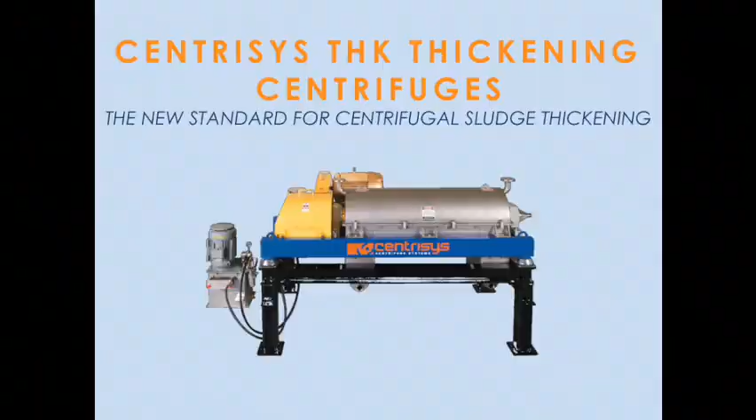We're going to give you a quick rundown and a more in-depth look to expand upon what Michael was saying with our THK division. We have a lot of new stuff coming up, and we'd like to share that with you. This is a presentation we recently gave in New York.

It's a little bit on the salesy side, but that's kind of what we do. We sell Centrifuge, we don't sell technology. Well, we sell a lifestyle too. And coats. So, yeah, if anything seems a little goofy, it's just the way we put it together for New York.

Look at that. All right. So this is Andre and me. We're from two ends of the spectrum when it comes to Centrisys. He's in the office in B2, I'm on the second floor in B1.

Michael told me I wasn't allowed to give this presentation unless I was wearing some Centrisys swag, a polo or whatever. This is my swag. I'm upstairs in the lab, running around with 5-gallon buckets playing with polymer.

On my end of things, I'm in the process department. I work with the process of where we fit into wastewater treatment. We sell a machine that goes to a plant and produces cake. It dewaters, and from there a lot of things happen, and we can do a lot of analysis on what we do and how we do it.

Wastewater treatment plants are okay—historically that's been our bread and butter. They're regulated by the EPA, which is why the EPA is awesome. Every time they increase regulations, wastewater treatment plants have more incentive to buy our equipment because they have to dewater and they can't keep getting away with the tricks they've been pulling in the past.

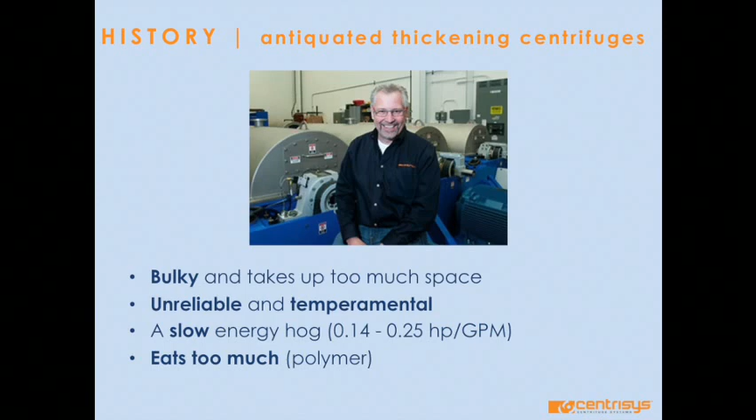They're slow. They have a slow capacity and they're a slow energy hog, and that's something George kind of talked about earlier. We're increasing the capacity and the performance of our machines with new energy and new technologies, and they eat too much—Michael glossed over polymer, but that's why I'm upstairs in the lab running around with it. Polymer is very, very expensive to plants. They get mad at me when I say we have a relationship with a company called Ashland.

We get it pretty much for free from them. That's because I'm upstairs in the lab trying to figure out which Ashland product to test for a plant and which polymer makes our product work best. Because at this point in the industry, with dewatering, you have to use polymer. But with thickening, we're getting away from that, and we are in a market and at a position where we can save plants a lot of money.

And that's why Michael's very excited and grinning creepily. No pun intended with this slide, by the way. Yeah. Nothing was intended there. Andre? All right.

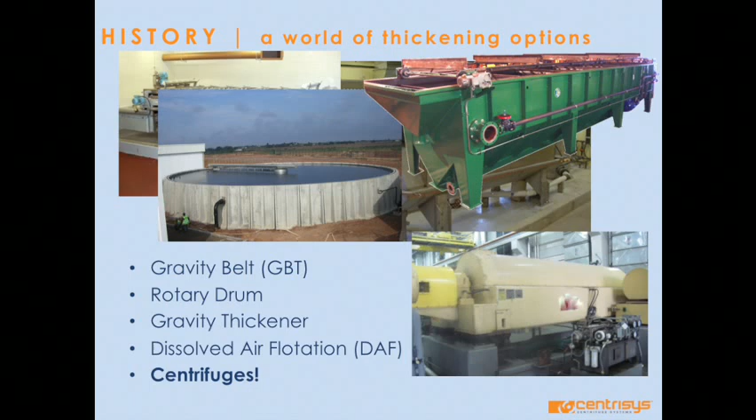Let's take a brief look at some of the current and historical alternative thickening technologies. We won't spend too much time on them, but to give you a brief run through, we're talking about gravity belt thickeners, gravity concentrators and thickeners, rotary drums, the DAFT as seen at Kenosha, and so on. And of course, there's always the good old centrifugal thickening. That's pretty much where we come in, and we've had the distinct advantage of looking at all these former technologies, looking at their pros and cons, and taking some of their weaknesses and making them our strengths. So with that said, Mike can tell you a little bit more about the Centrisys twist on our THK division.

It's just that, it's a twist. We came up with a proprietary air delivery system. We couldn't really share much with New York because it's proprietary. It stays within this room, folks. It's our thing. Except for the video.

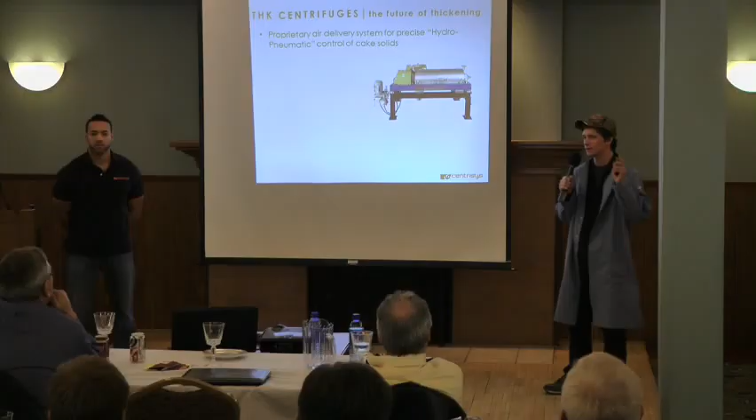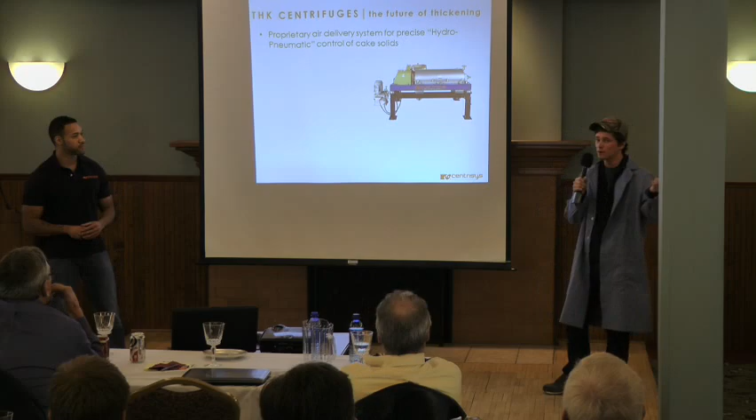We got really good control of cake solids, and what that means is we're able to maintain the performance and the output of the machine, and if something happens, all you've got to do is push a button and you'll see a response right away. With other old centrifuges, you had to shut down, open it up, make a change, maybe change the polymer dose, turn it back up, get it back going. Maybe it was going to work, maybe it wasn't. You didn't know, so you're kind of guessing. It's a guessing game, but with us, we took that out.

We also came up with a plow design for solids discharge, which was more of a mechanical thing. Andre can touch on that. Absolutely. As Mike said, anyone that's been in the field can tell you that when you're doing a demonstration or optimizing a machine, shutting down to make a mechanical adjustment is something you don't want unless you have to. So one means we have of handling the grit and trash on a lot of these thickening applications is our proprietary plow design, which Michael shared a little when you saw the cross-section of the machine.

Kind of stole our slide with Stokes' Law. I'm just giving you something. Still have our presentation, folks.

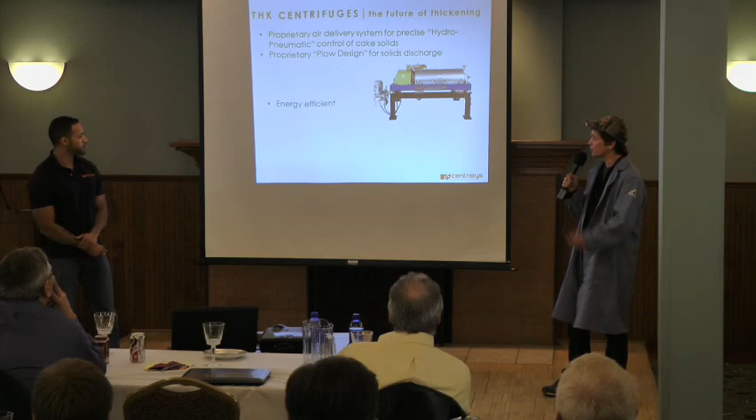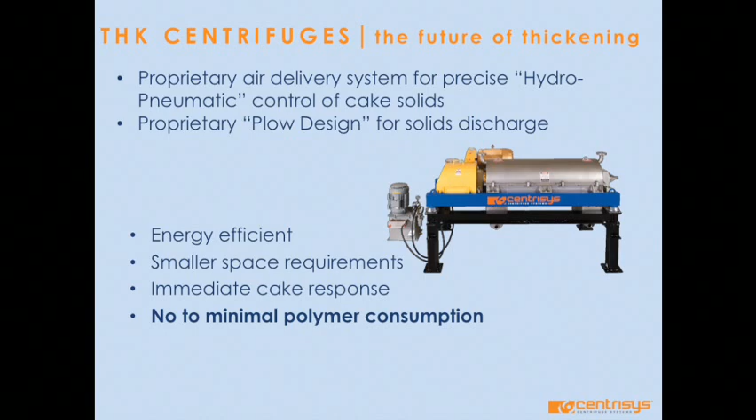But no, really, the design of this machine is extremely effective, and it offers us some solutions. If you want to continue on here, Mike. So in the end, we've been doing a lot of analysis, which we'll touch on in a minute. Our product is energy efficient, it's smaller, it's got an immediate cake response, and we have no, emphasize no, to minimal polymer consumption, which, for those of you that aren't in this end of it, is a big thing for us.

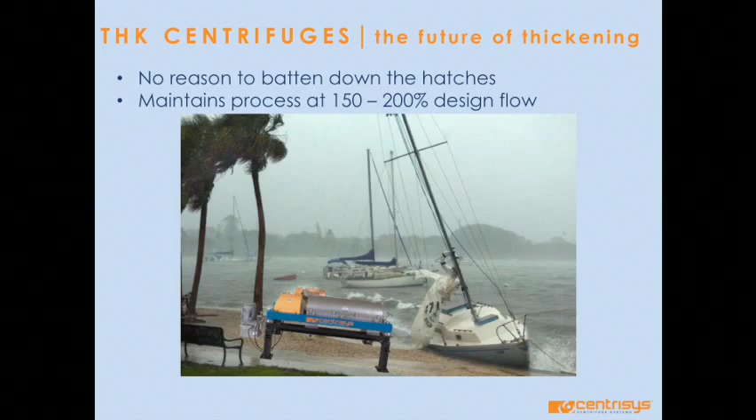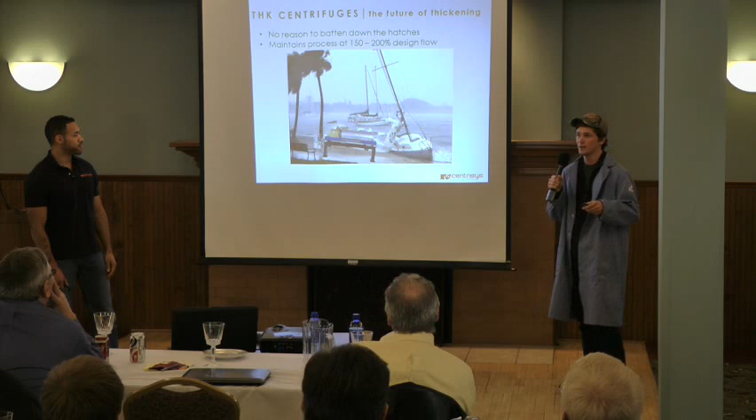And a big concern with New York, and we were kind of back and forth whether this was a little too soon. They had a lot of issues with Sandy. An influx of rain and water changes your feed significantly and what your plant operation has to do. From a process standpoint, you've got to respond to that. Your plant can't just shut down. People are going to keep doing what they have to do in the bathroom. You can't just close that valve, and your equipment has to keep performing. We are able to produce equipment that continues performing, and you don't really have to batten down the hatches.

We are trying to get sales to sell it at a certain design capacity, with the inference that if you do get a big rainfall or an influx of flow, we can maintain performance at 200% with few changes. But of course, sales is probably going to start selling them at that 200% flow, and then it's going to become process's problem again.

And now Andre can touch a little bit more about the design and why. Okay. This isn't the first time you guys have seen this slide, but further on what Mike was saying with the capability to handle some of the upstream fluctuations, whether it's due to solids loading or extremely adverse wet weather conditions such as Hurricane Sandy, our machine is able to regulate.

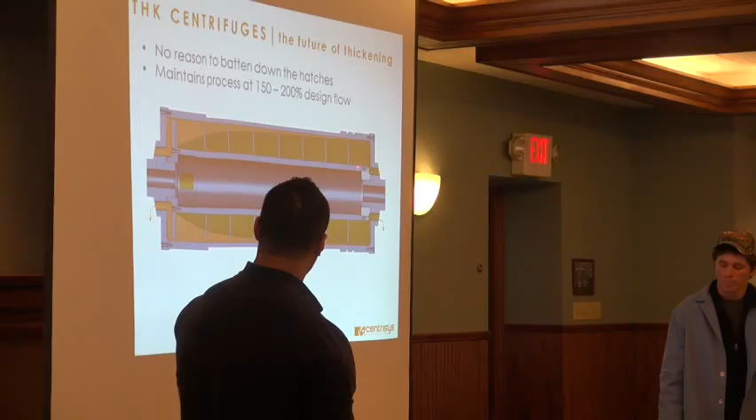The weapons we have to do that are obviously the differential speed, as in any centrifuge. And some of the other things that you notice, we have our proprietary design, again, with the plows, the air injection, which combined with the hydraulic effect and the air, that's what we've dubbed our Hydro-Pneumatic control of the cake solids. This is how we're able to really precisely control it within a fraction of a percent.

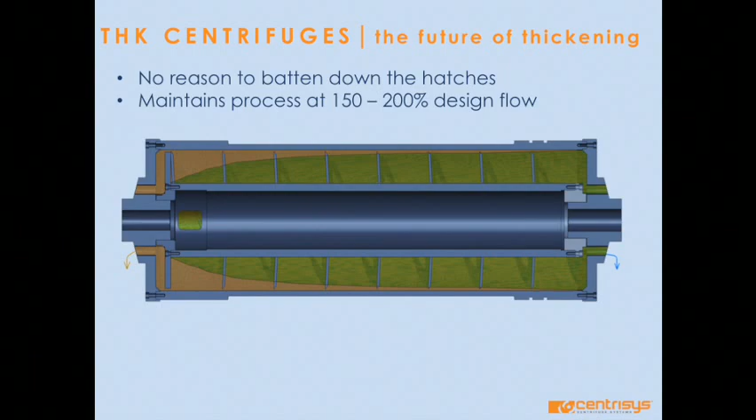And obviously the other big thing that you'll notice is there's no conical. So again, this is setting the bar a little bit higher, going out on a limb and trying something new here, and we've proved it at various sites. One other thing I'd like to point out on our design to help handle those large fluctuations, for extremely adverse conditions, we also have the option to inject a small low dosage of polymer.

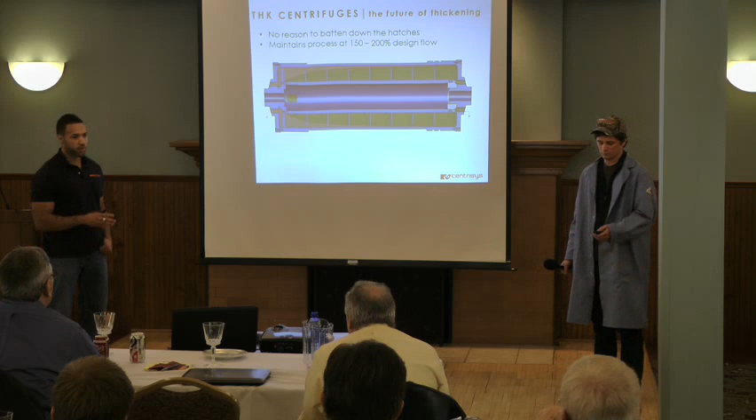So traditionally, where other manufacturers or other technologies are talking high dosage polymer for mediocre results, we have a proprietary design to inject internally and treat just a portion of the flow instead of the total flow of sludge. Okay, so this is where we differ and we save polymer.

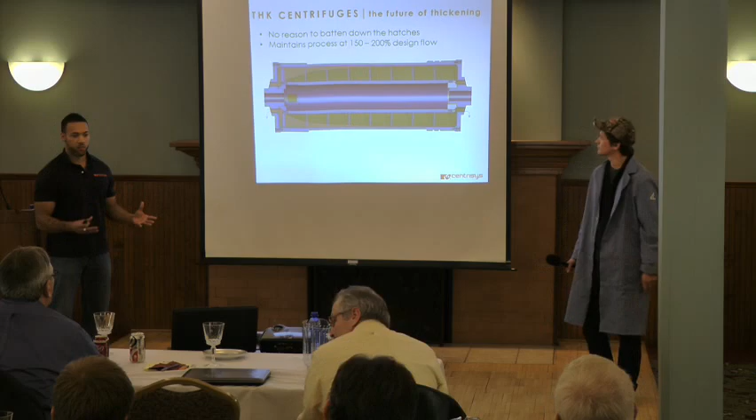Let's take a little bit closer look. You guys are all familiar with this. This would be Kenosha. Their existing DAF bays, they have twin bays basically running at all times, and we were able to come in with our CS18-3 thickener, and you can see we're 1/30th the floor footprint compared to the DAF.

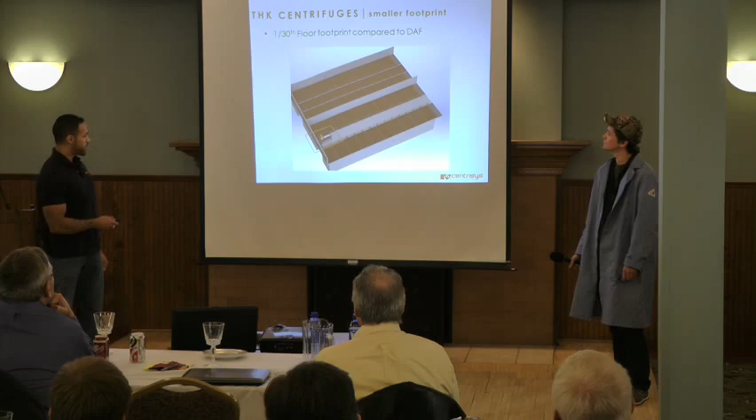We like to laugh and say next time you're there, feel free to take a dip in their newly installed swimming pools. Oldly installed. There you go.

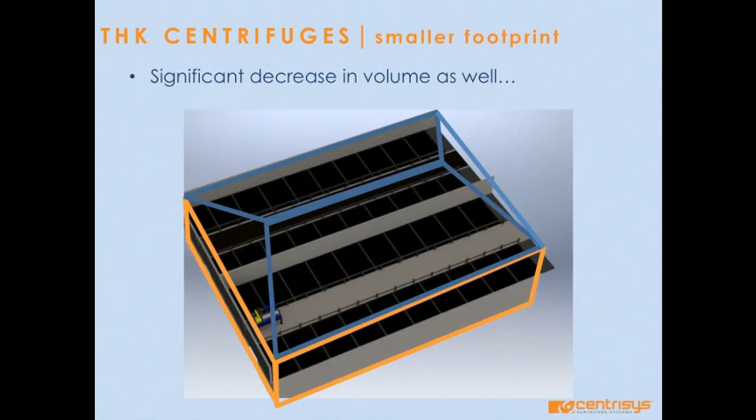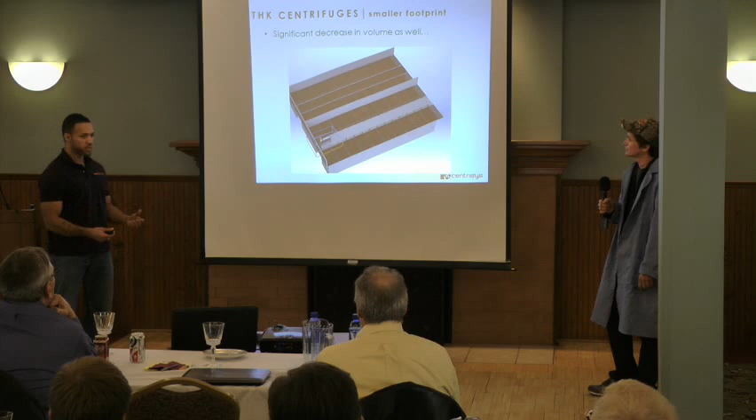So again, another feature to point out with our self-contained thickening unit, we don't have to worry about some of the other drawbacks, such as with the GBTs, they have the odor control, vapor control. Here you're exposed to open fluids and the mists and everything else from the DAFs. Exactly. So it's a much more hygienic operation. Everything's self-contained and so on.

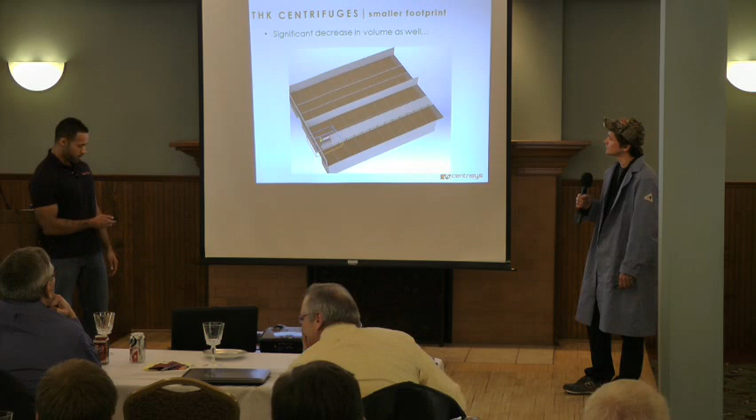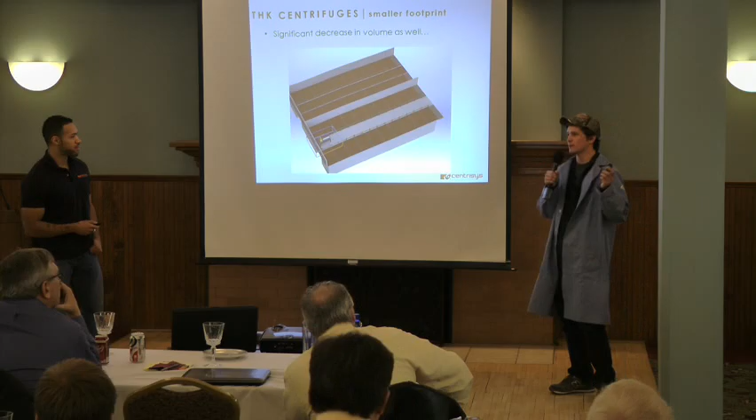Well, before Andre moves on, we sat in a presentation in New York, and this guy was talking about his DAFs and an installation, and he said, well, all you have to do is install air ventilation. Well, it's not as simple as that. I took air quality control. That's a big installation there. That's something you have to monitor regularly, and if you don't ventilate this properly, people can get sick. That's a big long-term cost, and simply by enclosing our bowl, we've cut that out.

Absolutely. That's a big deal. Our competitors like to say, "Oh, just do that." It's a lot bigger, and it's to our advantage. We've got huge gains. Well, not to mention some of the other benefits. Again, with our unit, I like to pick on the GBT sometimes because we had the pleasure of sitting in their presentations in New York.

But there's other things besides odor control, where we have chemical buildings, polymer buildings, all these different buildings that you have to take into account when you look at the volume and the footprint. It's not just that unit. There's more to it than what you see there.

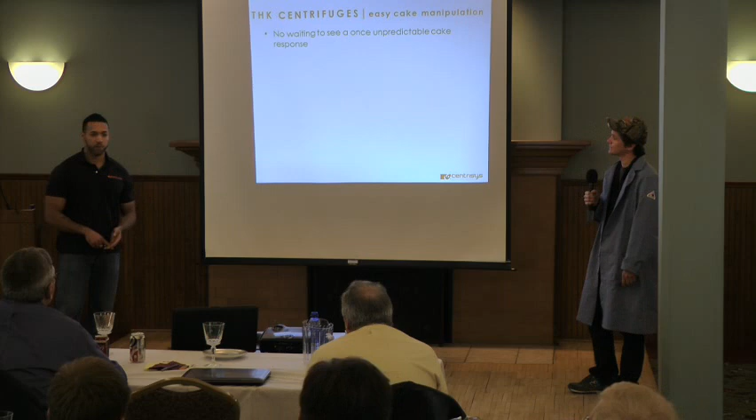What we'll see now is a demonstration we did at Kenosha on our 18-3 thickener. Basically, the purpose of the video is to show how rapid the response and how precise the control of our cake solids is from a simple regulation control change at the panel. And let's take a look at that for a moment before I continue.

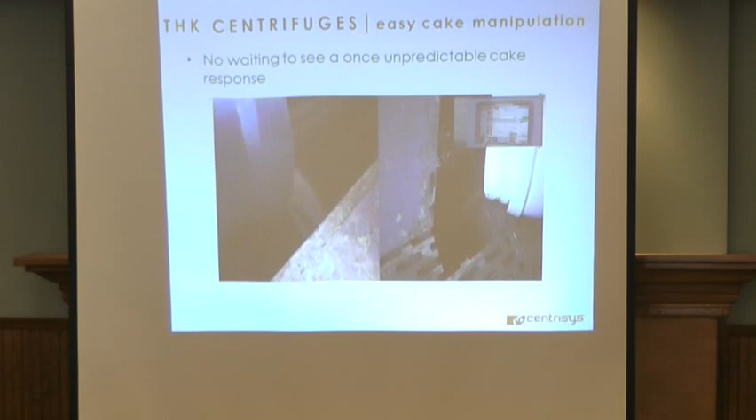On the right side, you'll see the sludge, left side centrate, and here's the control. So obviously we run a dilute cake first, make a simple adjustment, and within maybe a minute or so, we have an 8 to 10% cake.

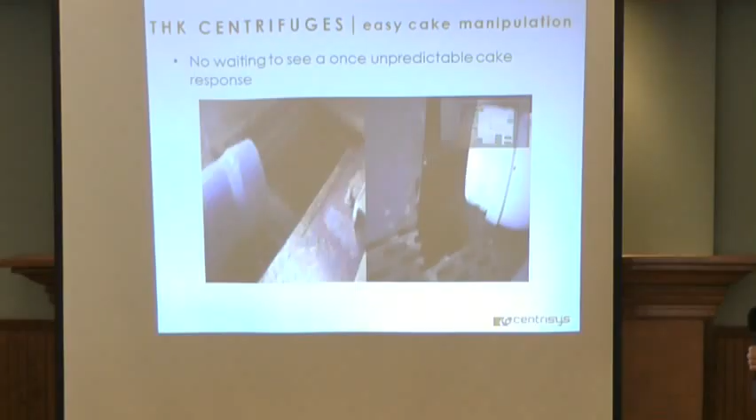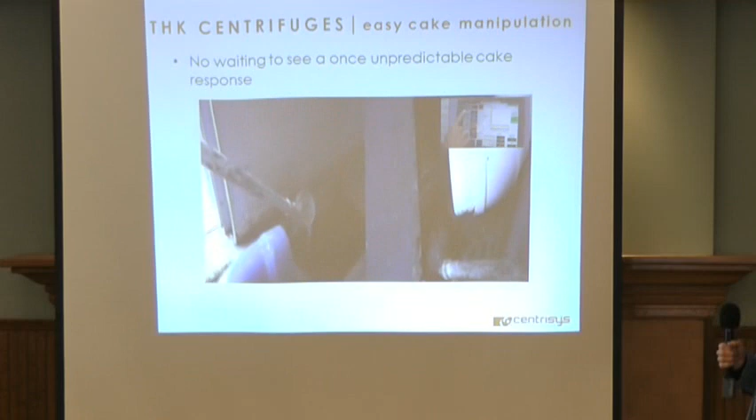And you can just as easily thin the sludge back down by adding the air, slowing down the differential speed to get you back to your 3 to 4% cake. If you watch this and let it loop through one more time, what I'd like to point out is if you keep your eye on the centrate, you'll notice no adverse impact on the recovery, which typically, if you go to alter the sludge and the thickness, historically it would require a mechanical adjustment, which would also

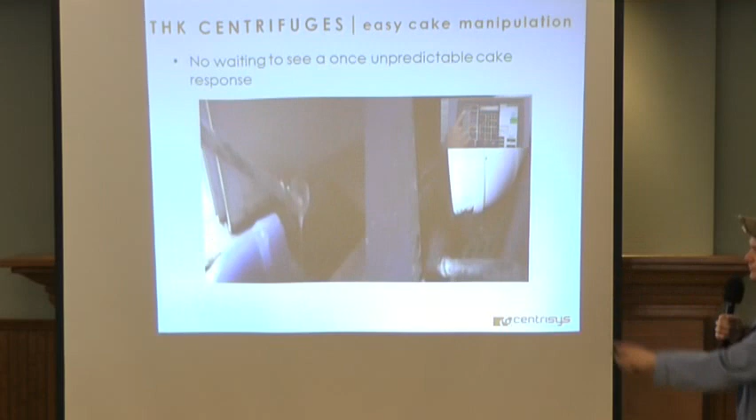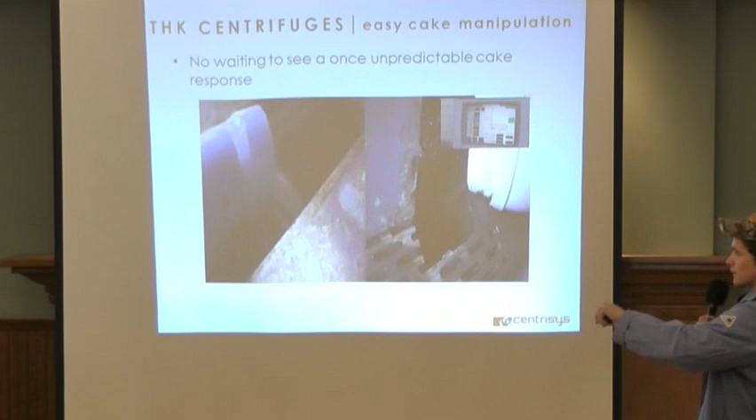impact the recovery. Looping through one more time, that centrate on the left is typically going back to the head of the plant, and it needs to be retreated again, reprocessed, and that's a big cost to the plant. If they keep cycling this water, that's money to them. The thicker that cake gets, the more solids are going down the line and into their process, and they don't have to keep retreating this, and it's cutting out this process, and it's more advantageous for the plant.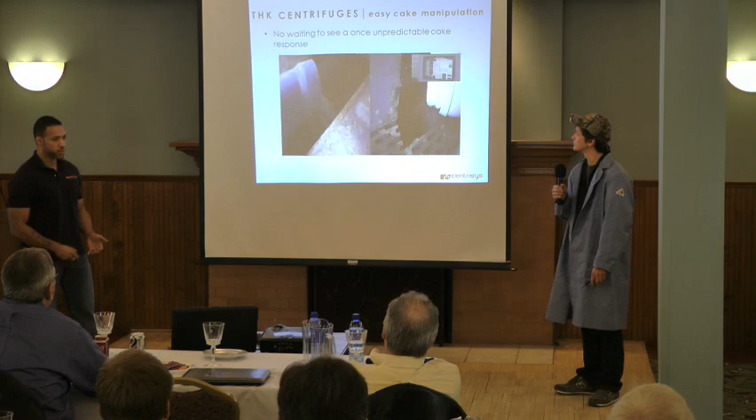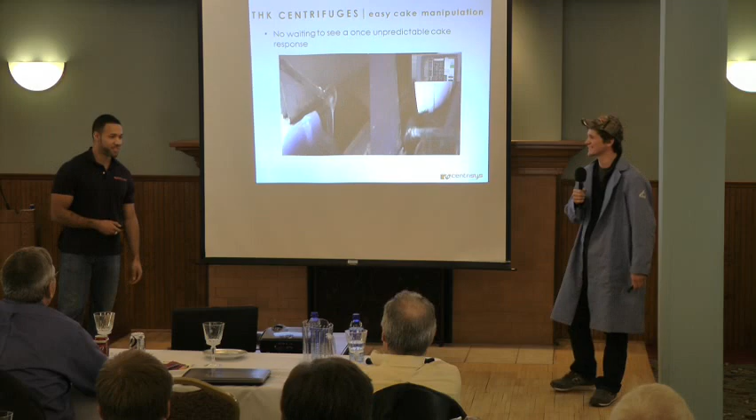One more side note, this video had to be reshot because in the top right, Andre was using the wrong finger to change the controls. There's no proof of that. But that stays within Centrisys.

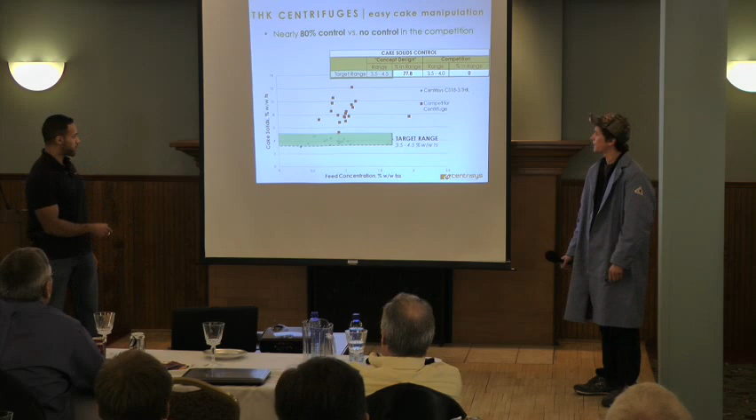That's internal. All right, to further validate our control of the cake solids, Bob Havern had the pleasure of going down to Pinellas, and he loves to tell this story. But to wrap it all up in a nutshell, they gave us an operating range from 3.5% to 4.5%. This is the cake they want coming out, okay? So it's not always thicker is better. There's actual set points that are dictated by the plant and their downstream pumps and so on.

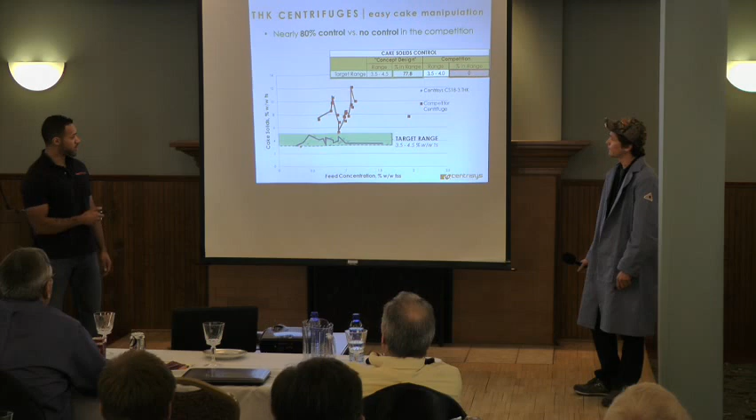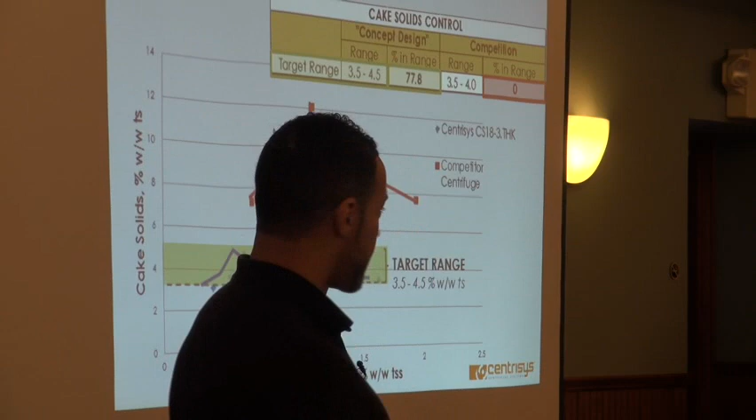We were able to fall within that range 80% of the time on a test that was manned by plant personnel, not Centrisys personnel. Whereas the competitor centrifuge, which I believe was Sharples at the time, was able to accomplish this feat 0% of the time. So you can see how precise this cake manipulation is.

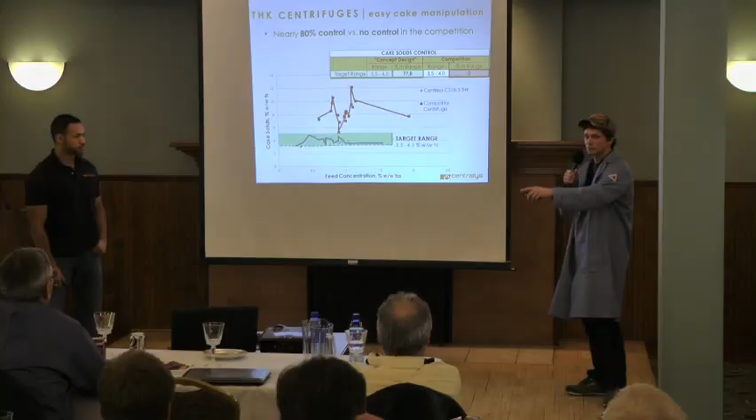Another thing I should note is some people might say, okay, Mike just said you want as many solids going into that centrate as possible. Well, why don't we just get as thick a cake as possible and call it a day? The reason this plant wanted a lower cake range, the target of 3.5 to 4.5, is because once you get a cake, you still got to pump it down the stream to your tanks, to your digesters, to whatever. Once you get a cake too thick, you can't pump that, and it becomes a problem.

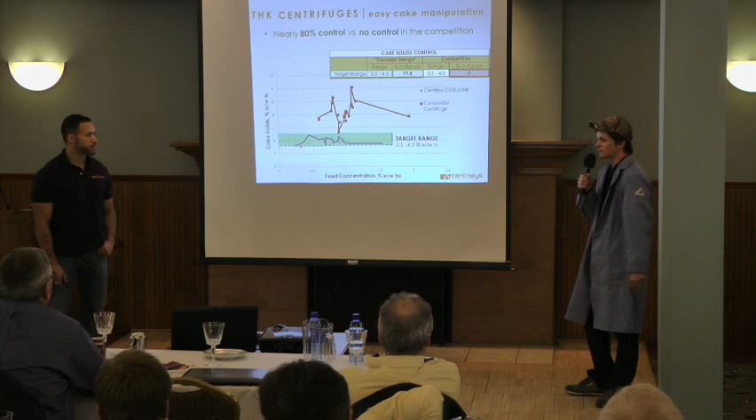You got to buy bigger pumps. You got to do this. You got to do that. So if you're able to maintain this range, that's good because you're not screwing up other things down the process. And those, I'll touch on in a minute, are fringe benefits, or as Michael likes to call them, French benefits.

And in terms of the THK, we had to do extensive validation testing of the equipment and analysis by our oldest and most experienced engineer. I sit in the office when I'm not in the lab, and I look at him typing away on his computer, putting up confusing graphs and throwing numbers at me, and it's a lot of fun.

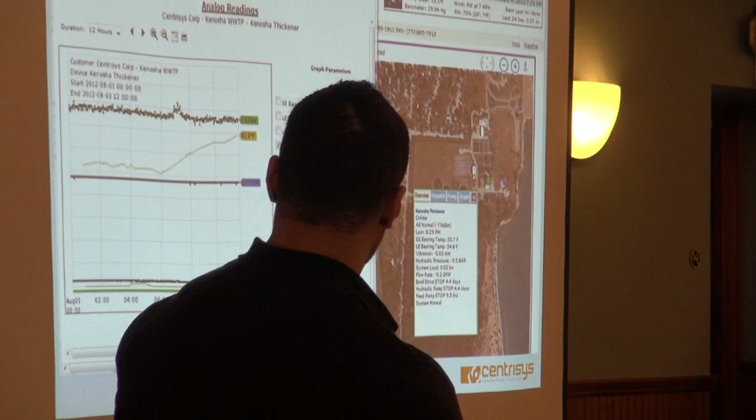But if you look at this given instance, they were running a total combined power of 7.63 kilowatt. Nice, stable, low bar pressure, which translates to a low torque operation. What do we have here, Mike? 4.7 bar at 131 gallons per minute. So what this means to the customer is basically this comes out to 0.059, 0.06 kilowatt hour per gallon per minute power consumption, where traditionally most centrifuge thickening technologies are running 0.15 to 0.3. In some cases, 0.35 kilowatt hour per gallon per minute.

Another good thing to note about the continuous monitoring is we can spot trends over time. You can look at a graph on a day and say, oh, crap, I'm running high power, something's wrong right now. But if you monitor trends, you can say, okay, maybe upstream something's going wrong with my process. Maybe I need to clean out a tank or look at a pump and send it in. You monitor trends, you can really keep an eye on your equipment and say, okay, in March we got to take it apart and service it. And that's really good for our client.

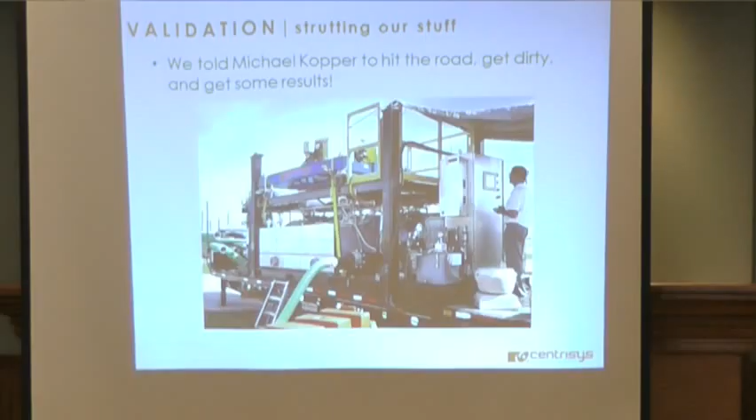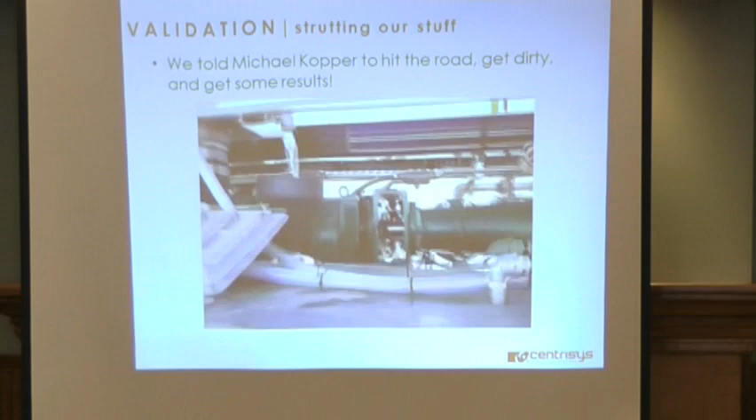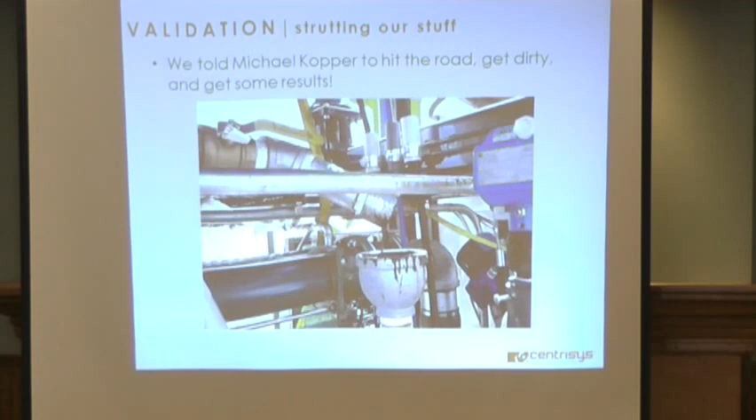So in terms of the validation, we told Michael to hit the road and get some results. All right. As you guys recall, last fall, we went down to Miami several times. Our basic goal here was to test our thickener under various sludge conditions. This is no polymer operation. As you can see, we're recovering very, very well on the centrate. The goal typically was 4 to 6% solids or cake coming out of the machine, which is a very typical spec in this industry, as we said earlier, more due to downstream limitations such as rotary lobe pumps and so on.

You can take another look here. This is a sample off of that actual operation.

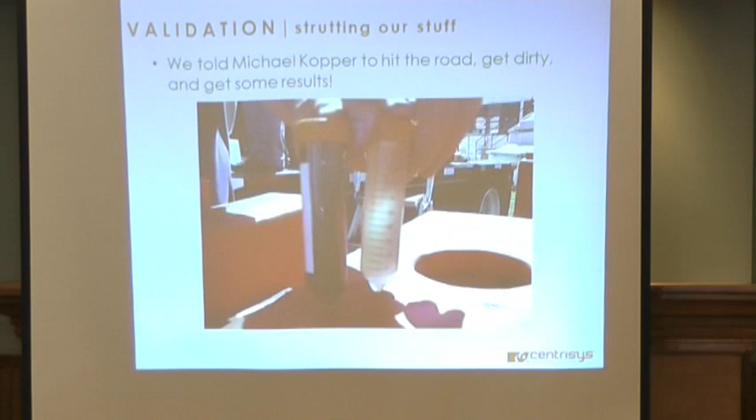And by the way, Michael's smiling in there. I'm assuming we did pretty good. He had them whitened for the video. Mike can share a little bit more about validation on that. We photoshopped it, all right. That was one of my editing tasks.

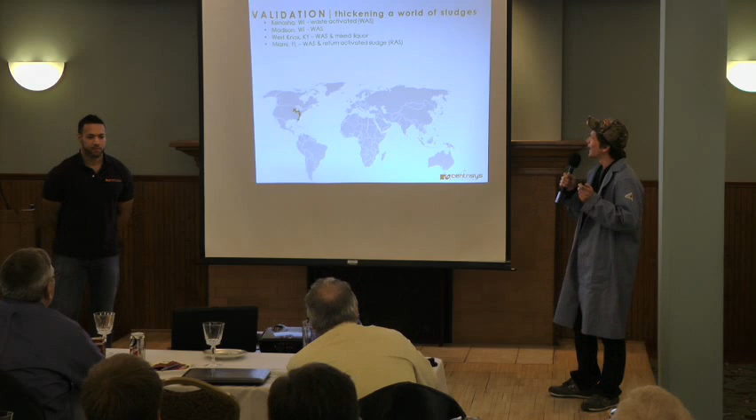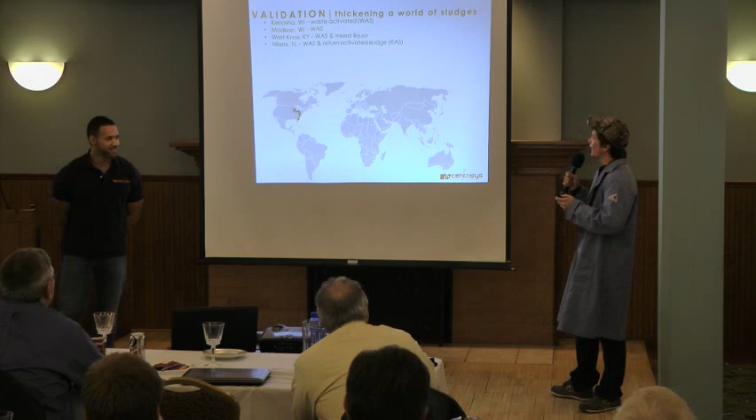So we started in Kenosha with a waste-activated sludge, just in our backyard. We had a test out in Madison. We went out to West Knox, Kentucky. It was Kentucky. Was it Tennessee? Whatever. I was there. I should have known. Well, they didn't correct me in New York. We were in Miami, Key Biscayne, Pinellas, Dusseldorf, Beijing, and Singapore.

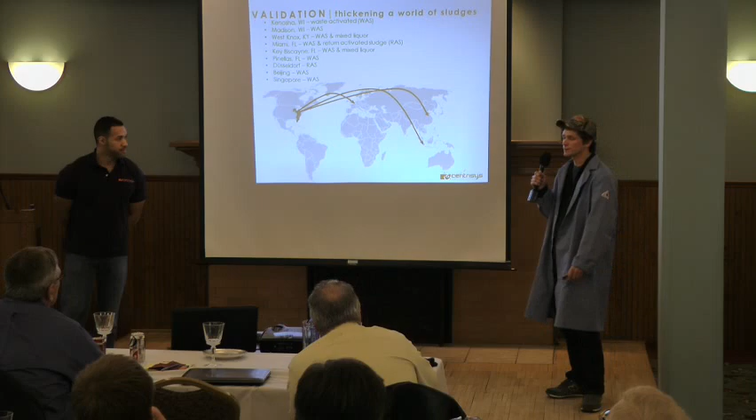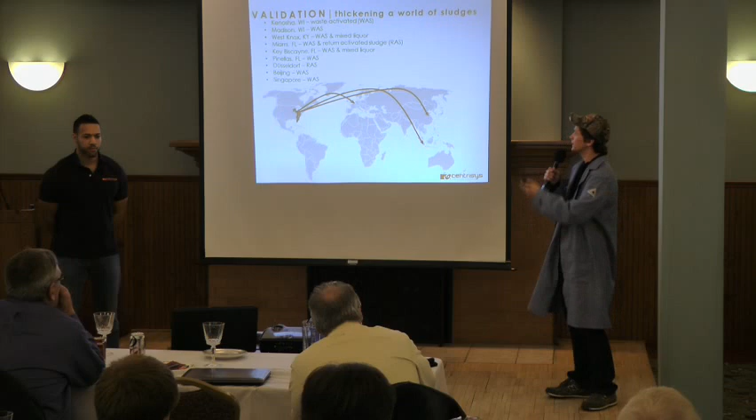And the important thing to note on here is we tested a variety of sludges and a variety of feeds. And even site to site, your sludge changes, and that affects your machine performance, because if you get a sandy feed, that can wear down plates in the bowl real fast. You got to be able to respond to that and say, okay, you're going to want to run at a lower torque, or you're going to want to run at a higher torque. In Beijing, you're not going to run the same way they're running in West Knox, Kentucky. But we work with them and we analyze this and we put it together for our clients. So that's a big edge for us.

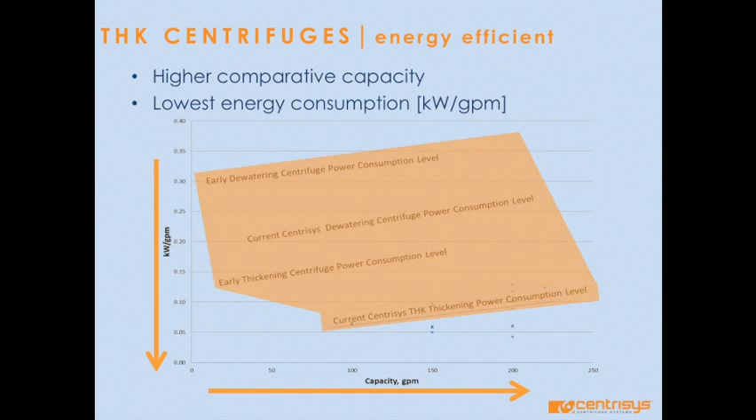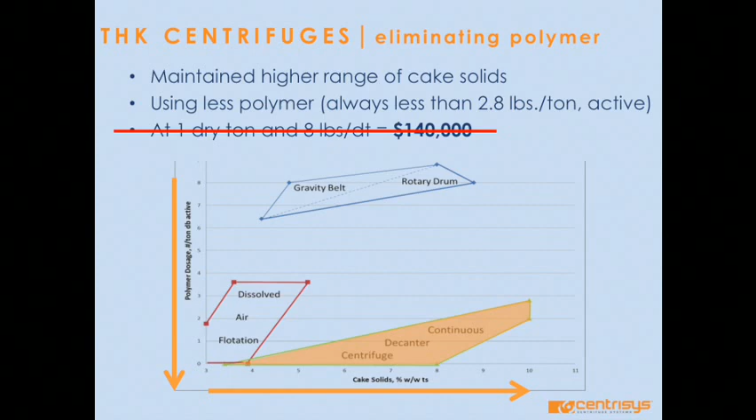So what we've done with our THK unit is actually take that and extend the range. So let's take our CS183 THK unit, where we've been able to go up to 250 gallons per minute, and projected levels even higher under certain sludge conditions. All right, so what this means for you, and this is a key point for you guys to stress, is greater capacity throughput at lowest energy consumption.

Now, this is my slide. I'm going to talk about the other big P word that a lot of people think about: polymer. Like I said before, it's an expensive resource for a lot of plants, and they really want to know how they can get rid of it, how they don't have to buy it anymore.

So if you look at this graph, here's where we stand. These are other thickening technologies. We've got a DAFT on the left, and then we've got gravity belt and rotary drum. So they're clearly in different ranges.

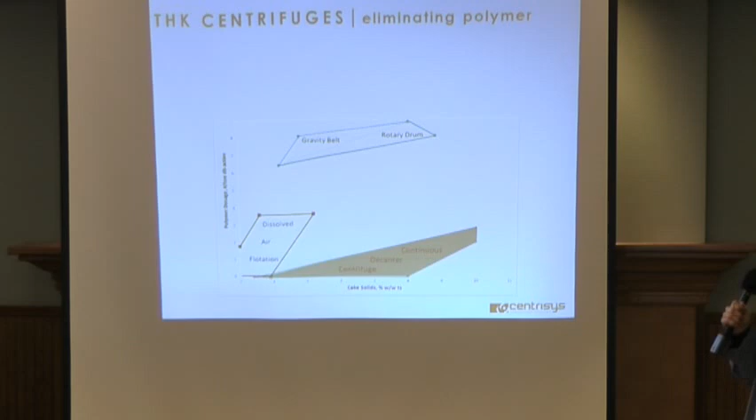Where we are is we can get a higher cake solids depending on what the client wants, and we can minimize or use less polymer. Usually we're running at no polymer, and the only instances where we run polymer is where we want to increase the capacity and maximize the cake solids. Usually, like I said before, we don't want to hit that 10% with the thickener.

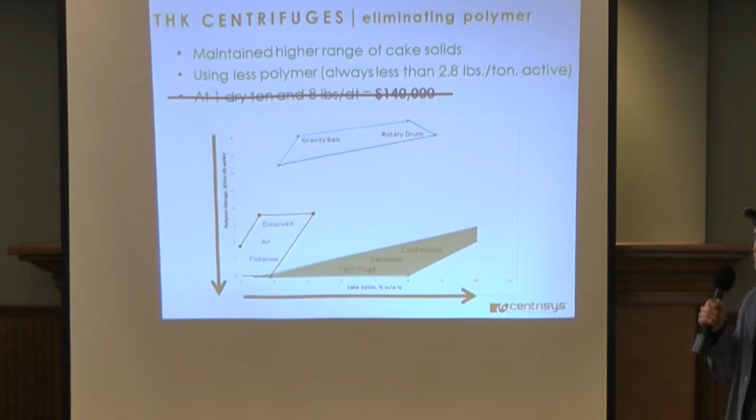In terms of savings for the client, we estimated at 1 dry ton, 8 pounds per dry ton dosing, that's $140,000, and we cut that out. That would be typical for what we've seen on our 18.3 unit.

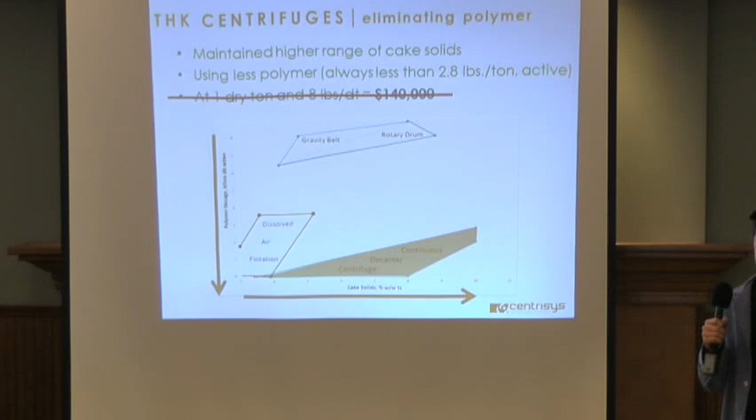And what the current prices right now, Michael, you probably know this off the top of your head, $2 to $2.50 per pound of polymer is a pretty good figure. That's where this actual formula is determined, and the 8 pound per dry ton is a very typical spec for a lot of the competitors. We've seen as high as 16 to 18 when we were at the New York presentations.

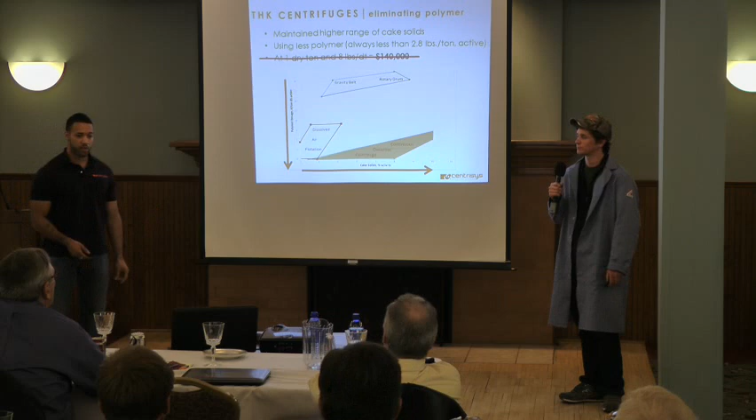That's a lot of polymer. That's a lot of polymer. So, I mean, your cost savings would be even greater at that rate.

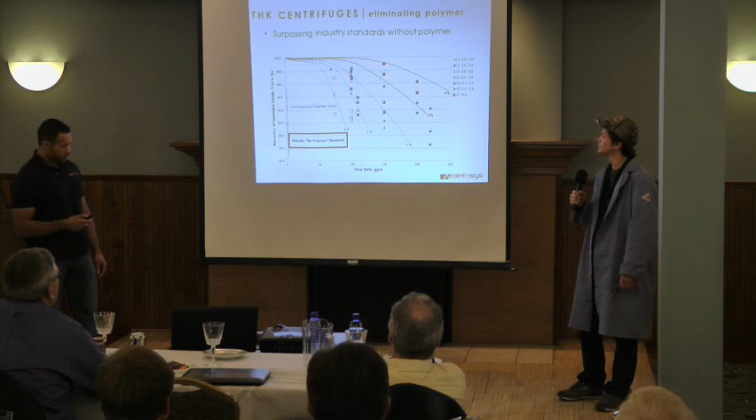All right, let's take a look at this. Historically, the industry no-polymer standard for centrifugal thickening has been, for the most part, between 85 to 88%. These are the levels that people strive for. As you can see, the flow rates are moderate at best.

What we've been able to do with our THK unit, for the same size machine, is extend the range. We're looking at flow over the bottom here, while also increasing the recovery.

The next phase, as we've been discussing, is to treat it with a low dosage of polymer. We're able to increase the recovery up to 90 to 99.9%, versus the commercial spec, which has basically been 90 to 93, 94%. What this means for you is greater flow rate, greater recovery, and dosing with low dosage of polymer where needed.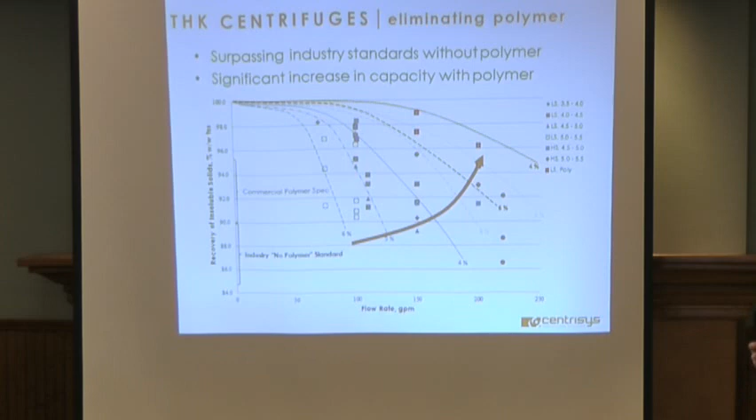So Andre just said we got a higher recovery, and basically what that means is you're not sending solids back to the headworks of your plant. You're able to send that down on its merry way down to your digesters, which is what we're going to talk about in a second.

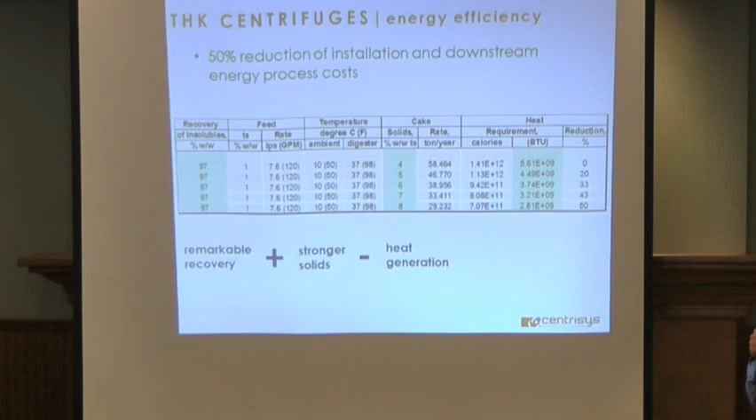We can hit that increased solids, and you don't have to heat these digesters as much. You've increased the capacity, and it's less heat generation required to maintain.

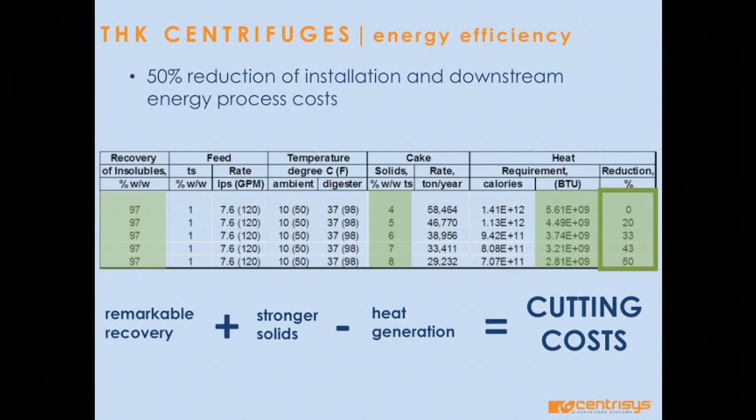So that's less heat generation required for that digester. And in a nutshell, we basically just say that's 50% cost cutting right there.

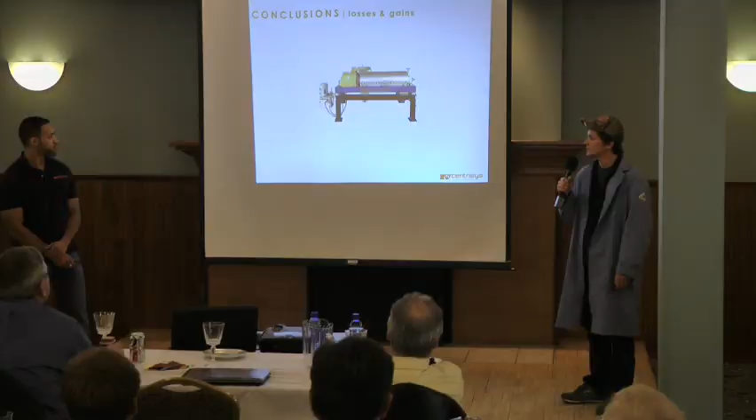So this is where we came to our conclusion at New York. I'll come to a conclusion here. With our equipment, there are losses and gains. We have increased hygienic operation compared to our competition. This bowl is completely enclosed. You don't have to come in contact with the sludge unless you want to, which we usually have to because we're doing testing, but such is the case.

Digester capacity, which I just touched on, less heat generation required, more money, increased energy efficiency, which Andre touched on, increase in cake manipulation, you've got a controlled process for the plant, reduced space requirement—that's one small machine right there compared to what our competition's putting in there.

There's a GBT sitting in the shop, which I don't know why it's there. Michael's buying GBTs on eBay.

Like I said, it reduces heating costs, reduces ventilation, and reduces operator attention. In New York, they had something like 36 machines, and they wanted to run with no guys there. We're trying to get there, but right now we're at about one guy, which is pretty remarkable - not having a man sitting there running these machines.

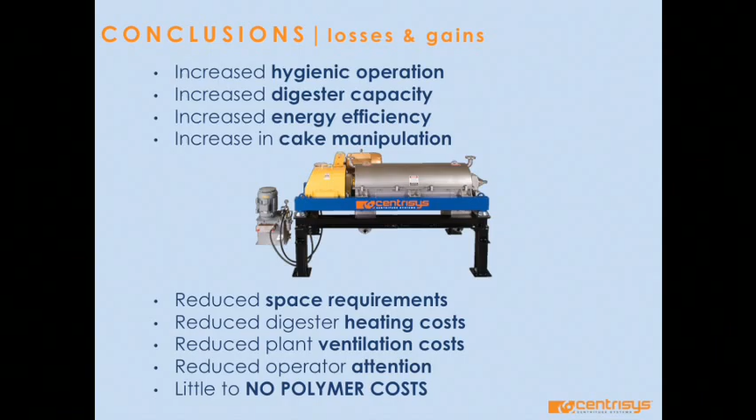To further that point, if you take our installation at Kenosha, it's really a 24/7 operation. Occasionally, and this is just standard practice - even with their old DAF - they'll have an operator come in, I believe 3 times a day, to take a sample. If something's wrong, he might make an adjustment, but it's really a 24/7 operation.

One time a week they shut down and grease the internal bearings. So what they ran into at New York, as Mike was saying, was basically they had to restaff it and actually make 3 separate projects to put the fire out and get an immediate solution to their problems, just to keep the operation flowing. Then it was a short-term solution, and beyond that - long-term, what are we going to do to solve this issue we're having?

Way too many man hours. Even mechanically, the equipment wasn't holding up.

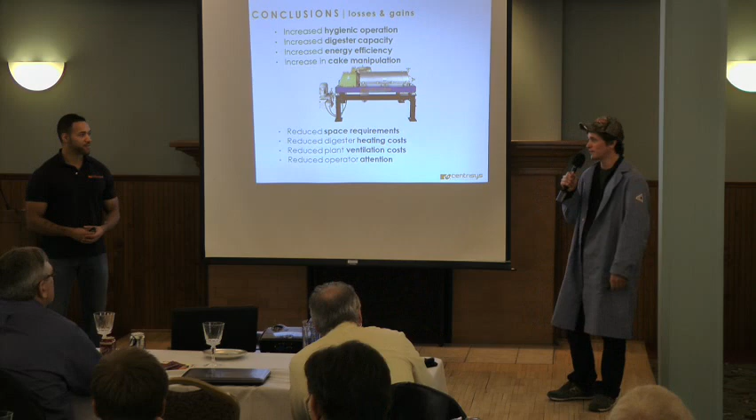New York's an interesting operation - they had a $2.5 billion budget, and I think they're at 4.5 now. Hopefully we're trying to get in there and let them throw some of that money our way. Well, we have some things to improve upon, that's for sure.

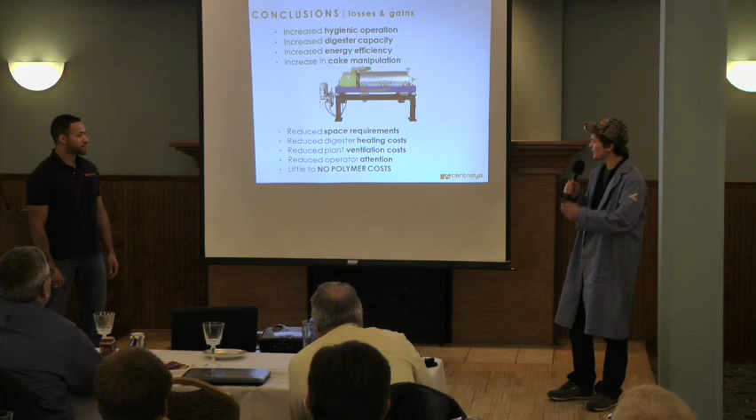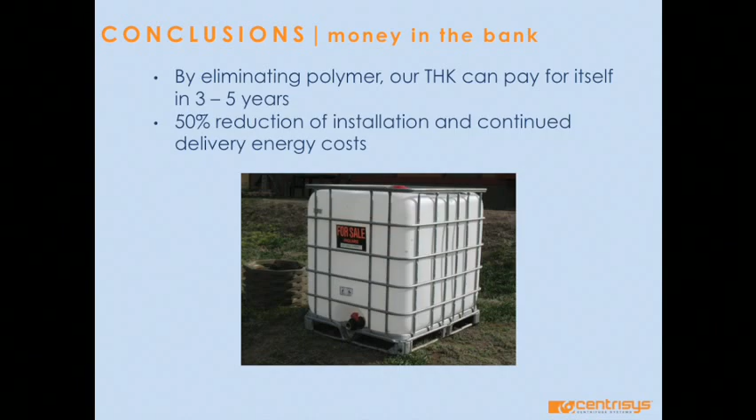Last one - little to no polymer costs. What that means for our client is they don't have to get creative with their polymer. Clients really try to do different things. I've been to a lot of plants where they'll say, okay, we bought a centrifuge, now I'm going to run it on drips of polymer, and I'll say that's not how we told you to run it - we're not going to guarantee that. And they say, well, polymer's expensive, we don't want to pay for it. I'll say, that's not my problem. But we're designing new equipment where they don't have to pay for it, and they don't have to get creative, like cheating on polymer.

There's also the installation and continued delivery costs. You have to come up with polymer systems, you have to monitor these systems, you have to maintain these systems. Cutting that out is really big on a plant's end.

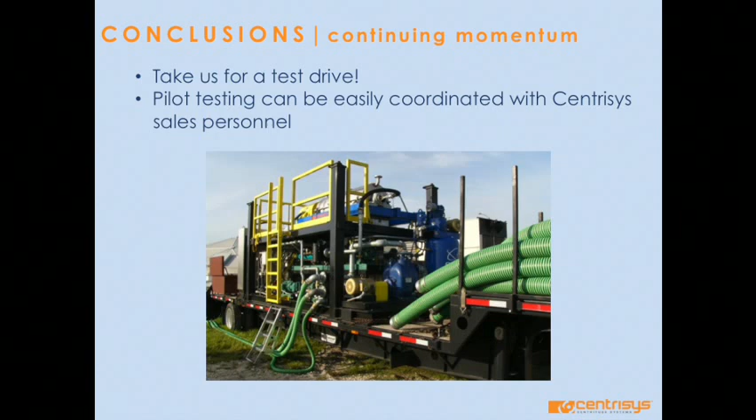Oftentimes there's even polymer buildings and transfer pumps and heating those buildings - these are things that aren't taken into account on their power consumption either, so keep that in mind. On our test trailer, it's just a few little 5-gallon buckets which we have to lug around, and even that's a pain. Bob Avern will be the first to tell you, but if you can cut that out for a plant - they're doing like 500-gallon totes - that's a big deal.

All right, does anyone have any questions regarding anything we do with our THK division or sludge thickening in general? Josh, put your hand down. I think Jack has a question. I don't want to get in trouble. Oh, the mic, sorry - Mike. Hey, Mike with the mic, right.

Hey, what are your recommendations for sizing? What should we promote our original sized unit at, and do you know what the equivalent gravity belt thickener would be? I'll walk over to Andre, we can share the answer. All right, I don't think I need that.

But yeah, as far as sizing goes, it's going to come down to site-specific - what does the plant need? Miami would be a perfect example - this is a 285 million gallon per day plant that's looking to run over 5 sites, I believe it's 1,200 gallon per minute per site. So theoretically you could run this through 2 very large machines, or you could do what we've done and offer 26-inch units. So instead of needing to add a 3rd machine, you run a duty standby setup.

Typically, the 18.3 unit - again, it's dependent upon the sludge conditions - but let's take a typical example at 1% sludge under normal conditions, waste activated. You're talking 80 to 200 gallon per minute on the 18.3 size unit, and in most scenarios you can get away with no polymer on that unit. If you'd like to extend that range and increase recovery, you can go to low dosage polymer. For the Miami jobs, some of the larger plants, we'd be focusing on our 26-inch unit, which is being designed to run 600 gallon per minute at around 85% duty cycle.

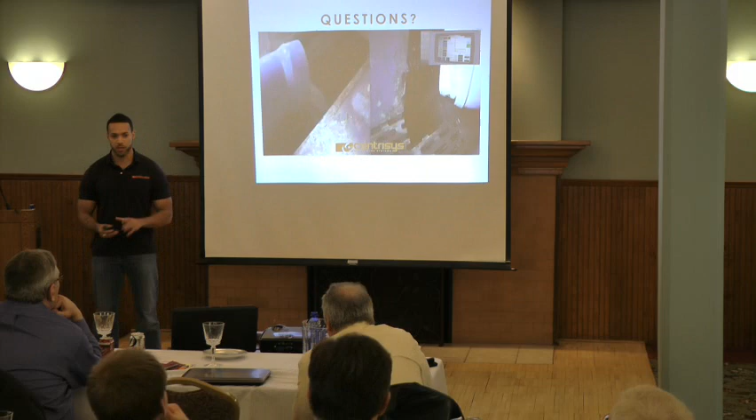Absolutely, that's exactly what Michael said. A perfect example: if we're running 100 gallons per minute with a 1% feed, and we bring that to a 5% feed, you're basically looking at around 20 gallons per minute because of the offset in solids loading.

Yeah, I think he's just trying to pick on Mike. No, but I just had a question.

On the slide with the globe showing testing locations, I saw that some said we were thickening, and we tested return activated sludge. I'm a little confused — I don't see what the purpose of doing that would be, so I was wondering if you'd elaborate on that.

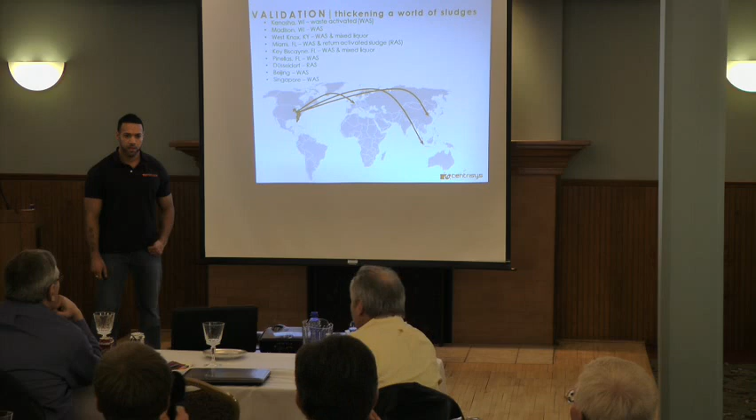I think Michael would have the best idea on the purpose of the return activated sludge. We did run that in Miami and a couple other sites. We didn't run return activated — we ran mixed liquor there. I have no idea why people want to do that. They just want to concentrate the concentration in the aeration tanks, that's the only reason. But we ran mixed liquor, and I do not know why we ran mixed liquor. I've never concentrated mixed liquor, period.

It's an R&D thing, you know. Nonetheless, we've been very successful with it — we were able to concentrate the mixed liquor to about 3% solids.

While Josh was gone for six months, a lot of things happened, a lot of research happened. We tried new things, we expanded our scope and expanded our mindset. Any other questions? It's all that playing in Denmark, Josh.

Louis? I was just wondering how long it took you to do all these tests we talked about, and why you guys keep this in Florida, not in California?

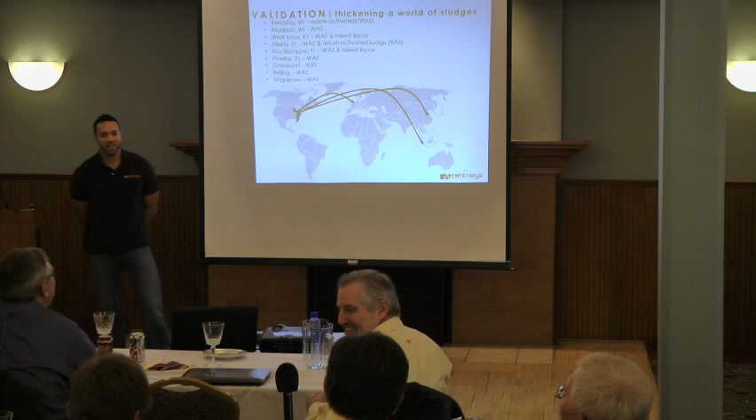Do you have a passport? Hey, I'm just the mechanical engineer, I don't do the scheduling. We will be headed your way soon. Okay, thank you very much.

All right, I guess — oh, one more? Just about the mixed liquor at West Knox, wherever that was.

Their mixed liquor waste activated sludge was about 0.5% concentration, and they were going to a belt press, so they had to increase the concentration. That's why they were actually looking at the thickener. They're looking at going to a new plant that will likely have a centrifuge rather than a belt press. And even then, we looked at the economics, and it's economical to put the thickener in front of our centrifuge on the new plant.